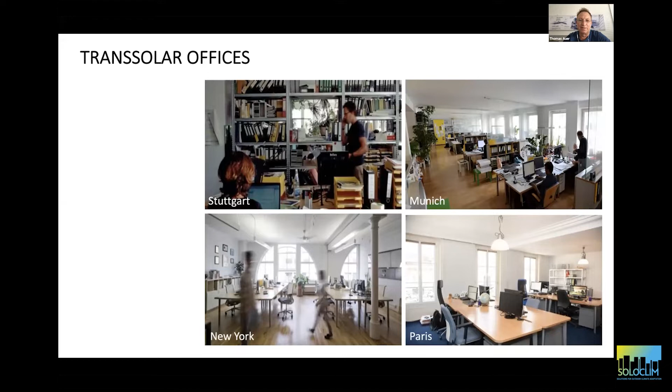climate engineering. We are doing this now for almost 30 years. Next year it's going to be our 30th anniversary. And we always called it climate engineering. As I said, it was more about developing climate strategies for indoor environments. But almost 15, 20 years ago, particularly in context of urban design, we started to look also in outdoor environments. Since 2014, I'm also a professor at the Technical University in Munich.

And so this is my team at the Technical University in Munich at TUM. And I feel really privileged to be able to work on both sides, to work in the academic environment as well as in practice, even though the academic environment certainly became the focus of my work.

Climate engineering, what it means, just quickly: we did this installation in 2010. We got invited to do an installation at the Architecture Biennale in Venice in Italy. And we had this idea to do an indoor cloud. We did a cloud once before in an indoor environment, and we did this not because we wanted to show that we are artists. We did this because we think that doing a cloud in an indoor environment is the visualization of climate engineering. You have to manipulate climate to the extent that a cloud starts to appear.

And since you all come from physics or engineering background somehow, you know that only water particles in air become visible as a cloud. And in order to have water particles in air, you need to have a saturated layer of 100% humidity. And if you have a saturated layer of 100% humidity, you can spray in water and the water cannot evaporate and it starts to appear as a cloud. So that's the idea.

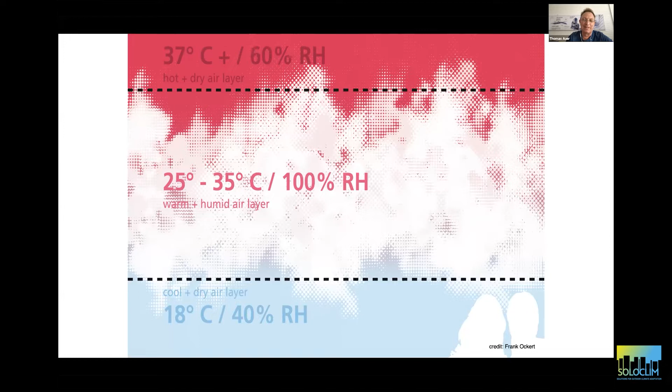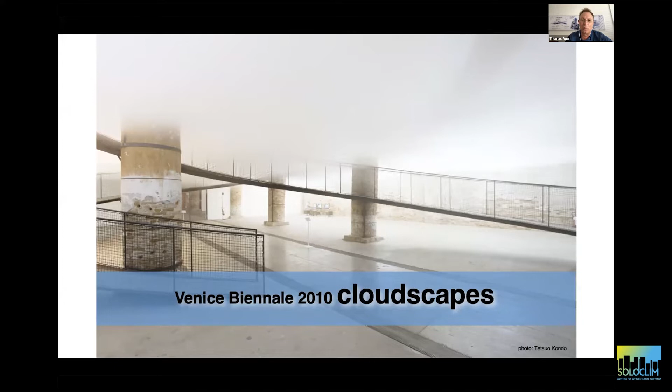So the physics behind is actually quite easy and straightforward, but it took us almost 4 months of testing and trial and error until we achieved the stable layers so that the clouds started to appear. Tetsuo Kondo, an architect from Japan, designed the space, he designed the ramp where people could walk and experience the different temperatures and humidities within this cloud layer.

So here you see what's our understanding of climate engineering. We usually don't do clouds. It's about comfort, it's about environmental quality in a space. But you can see to what extent one can really manipulate climate locally so that we provide comfort where people are. Now, jumping to the outdoor environment, I think what's very important is that we distinguish between outdoor comfort and urban microclimate. It's somehow related, but at the end of the day, it's 2 different things and 2 different strategies we need for one and the other.

By the way, this is a picture from Damascus, which we took in times when there was no civil war in Syria. It was quite interesting for us to recognize that people live and spend time in an outdoor environment in a climate where in summer during daytime you have temperatures around 40-ish degrees every day. So you really wonder, why do people enjoy the outdoor environment? Something similar we also found later in Singapore and Kuala Lumpur. In a very humid environment, people appreciated an outdoor environment treated to a certain extent over a fully air-conditioned, overcooled indoor environment.

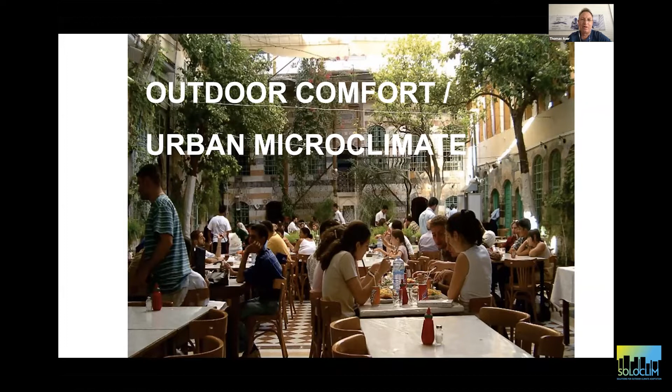So this made us curious, and we started to dig into it. We were certainly not the first one. We built up on a lot of research that happened before at several universities.

In 2014, our Munich office, Wolfgang Kessling, worked on this with a team from Austria on the Austrian pavilion at the Expo in Milan, called Breathe Austria. By the way, it was the only pavilion at the Expo in Milan which did not have any air conditioning—most of it was outside. The idea was to bring a forest from Austria to Milan to create a microclimate and make people breathe Austrian air.

There was something like 600 square meters of land one could use to bring this forest to Milan, but the intention was to bring the cooling potential of 1 hectare of forest to Milan. In order to increase the evapotranspiration of vegetation, we combined this with elevated airspeed and a dry fog system—adding more evaporative cooling by a mechanical system.

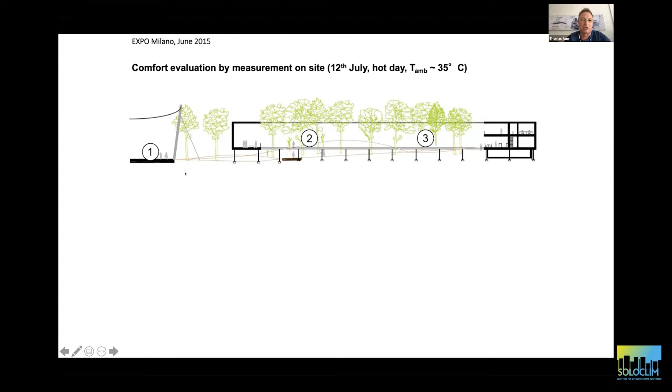Outside the pavilion there was a main street—I can't remember its name—from which all the pavilions went off, covered by a fabric shading device. So position 1 was already in the shade. These are the UTCI values—Universal Thermal Climate Index, a kind of perceived temperature. I think in this audience everybody knows this metric of perceived outdoor conditions.

What we measured in this main street was an air temperature of 34.5 degrees, a relative humidity of 44%, but a mean radiant temperature of 38.4, and basically no wind speed at 0.3 meters per second. This led to a UTCI of 36, almost getting into the area of extreme heat stress, just below it. What you recognize is the high mean radiant temperature.

What happens is that this fabric gets heated up by the sun and then acts as a radiator for the space below.

Now walking into the pavilion, there was still no evaporative cooling, just basically replacing shading from fabric by the shading of a tree. You see that the air temperature is a little lower, going down to 32.5. Humidity, obviously, when air temperature goes down, humidity goes up to a certain extent. But the mean radiant temperature goes down by 6 degrees, still with no air movement.

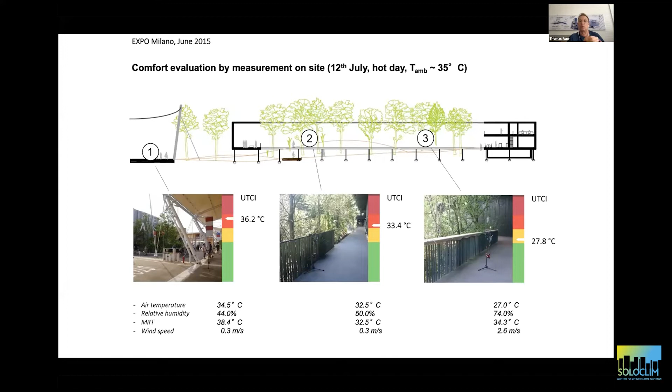So this is outdoor comfort. Of course it also has a microclimate effect, but it's not about the microclimate of a whole city. We see that in spots we can create environments where people find relief, where people can cool down. It's not a strategy for an entire city to work against climate change or increased temperature due to the urban heat island effect, but it's a strategy for a local spot, a local cool spot if you want, in a city where people can find relief.

You could say this is a cold environment anyway, so maybe people appreciate it. But particularly in Central Europe, buildings do not have air conditioning. In hot and humid environments like Singapore, people have air conditioning, and this increase in temperature leads to higher energy consumption. In Central Europe, we might get to a point where people suffer from this heat, with increased mortality during heat waves. We might reach a point where people start installing air conditioning on a big scale, which is certainly something we should avoid.

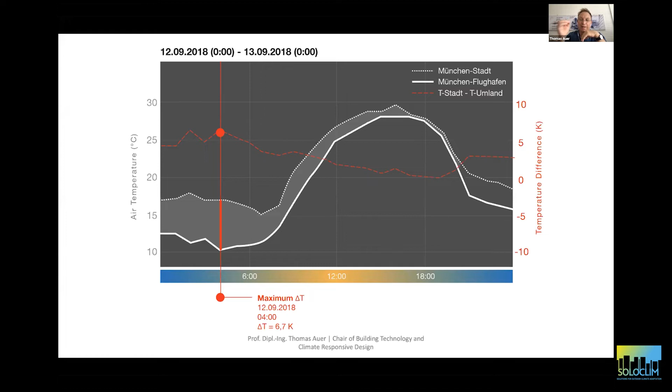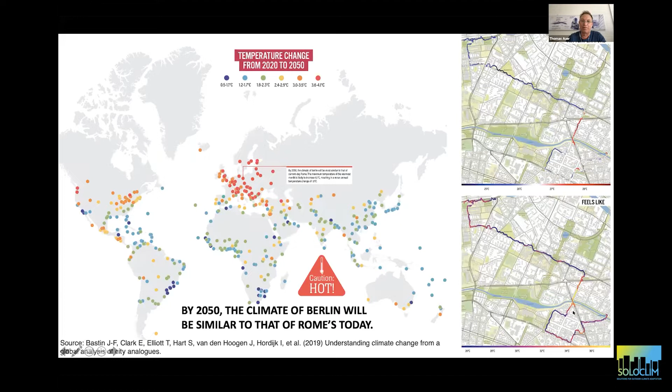This is when people start to suffer, when they don't find relief at nighttime because the city stays hot. So this is why we started these climate walks, to get a better understanding of urban morphology and outdoor comfort and microclimate, and as you saw in the Berlin example, the extreme variation is mainly based on urban morphology. It was about understanding how urban morphology really influences microclimate.

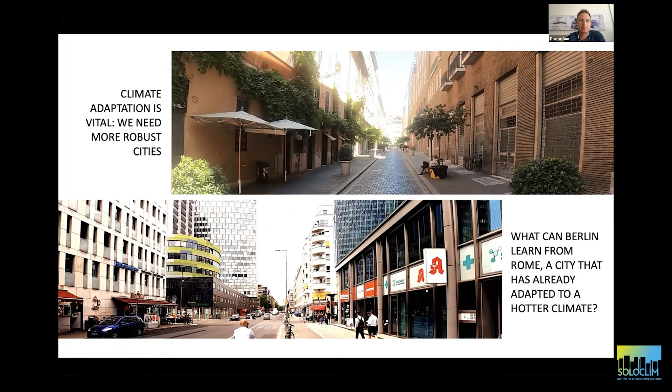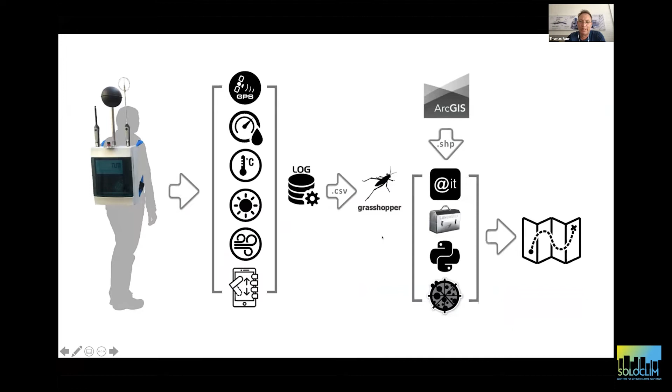This is Atta Chokachian in Berlin with our backpacks, which we use to do the climate walks. Here's what we measure: we have a GPS tracker so we know where we are, and we measure air temperature, mean radiant temperature, air movement, and humidity, as well as environmental parameters such as fine dust. Then in post-processing, we get all the data into a grasshopper routine so we can visualize it. At a certain point, we also started measuring skin temperature to better understand the physiology of people.

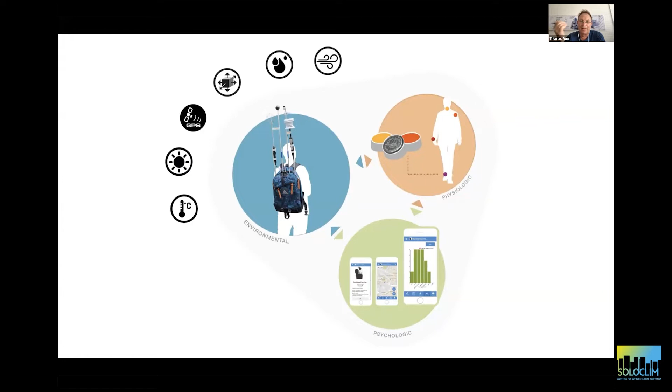And we have an app. We did this together with the Chinese University of Hong Kong. They started this climate walk, it was not our invention, we picked up on it. Together with the university, we developed this app where people give a response at certain locations about how they perceive the conditions. So we have the psychological, subjective response, the physiology by skin temperature, and the environmental data, and we try to correlate them with the urban morphology.

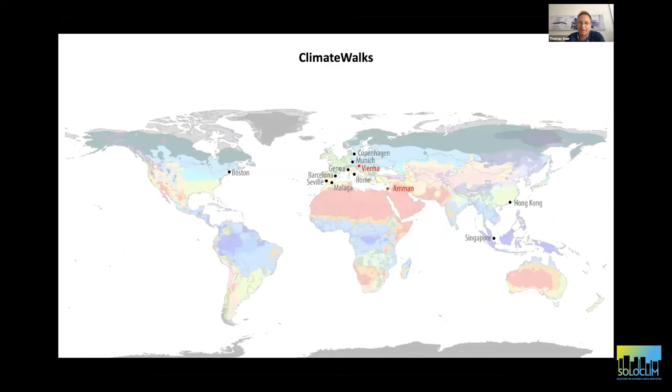So those are places where we already did climate walks in context of summer schools, etc. It's always a lot of fun.

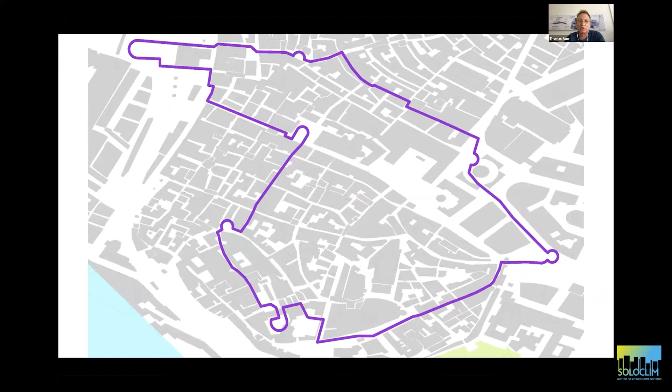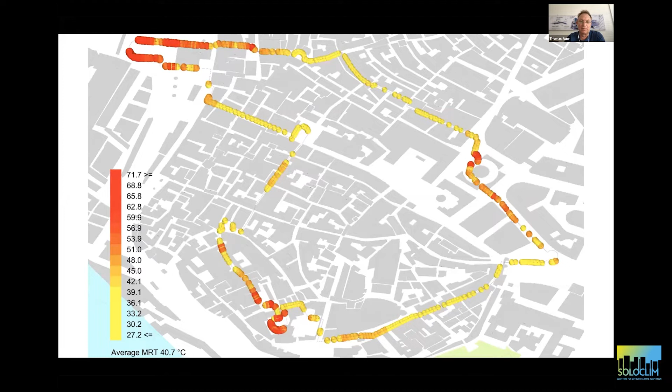This is the mean radiant temperature only, so we get the individual parameters so we can better understand what is contributing to the problem we have.

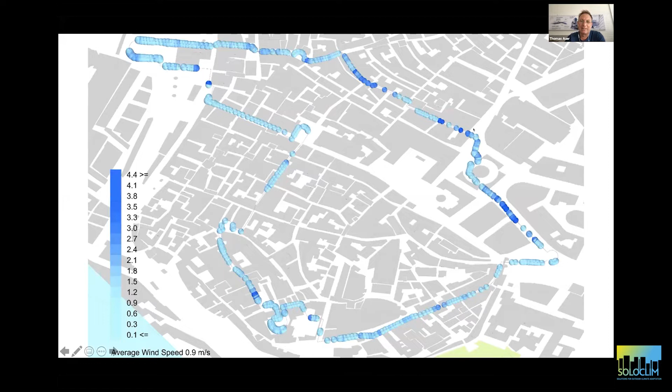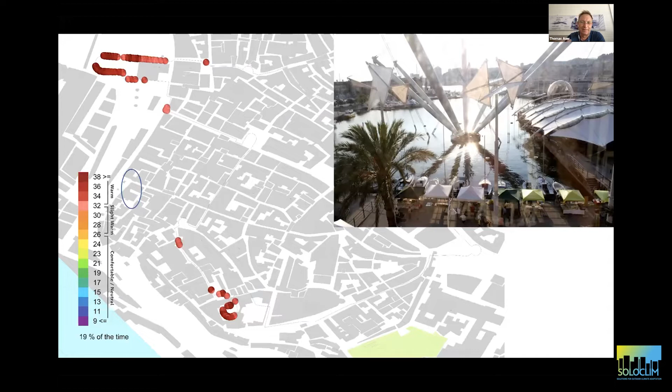The wind - you see we have higher wind speed up here in this street, which leads to lower UTCI temperatures up there. And then you see the result: there is a spot at the waterfront where you're exposed to the sun, which obviously leads to heat stress.

A surprise for us was to see a situation like here, where we have really good comfort conditions. We've seen the same in places like Rome and Seville, that this old medieval urban fabric provides really good comfort, really good microclimate conditions. It works really well - this self-shading effect in combination with thermal mass exposed to the outdoor environment, but thermal mass which doesn't heat up by the sun, which is not exposed to the sun.

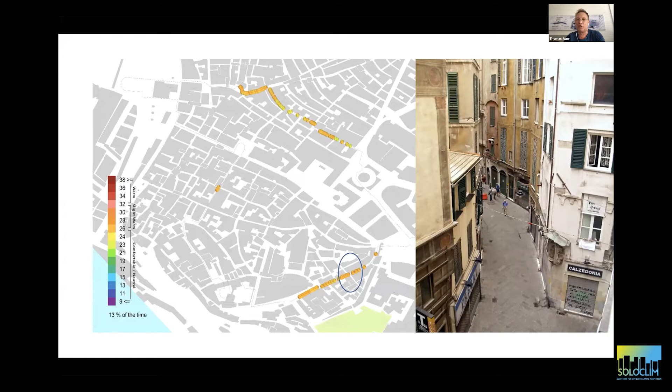So then we started to also look at sky view parameters so we get a better understanding of sky view, and can relate sky view with sun exposure.

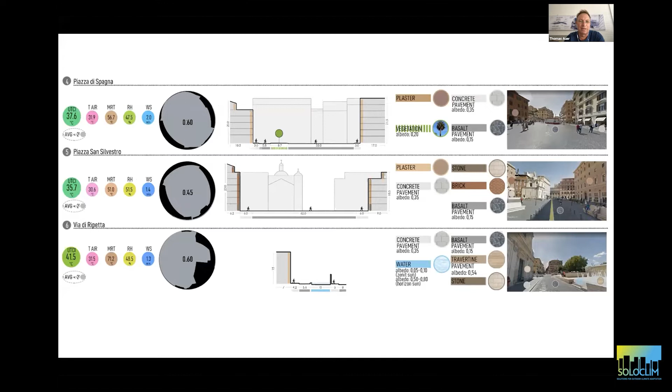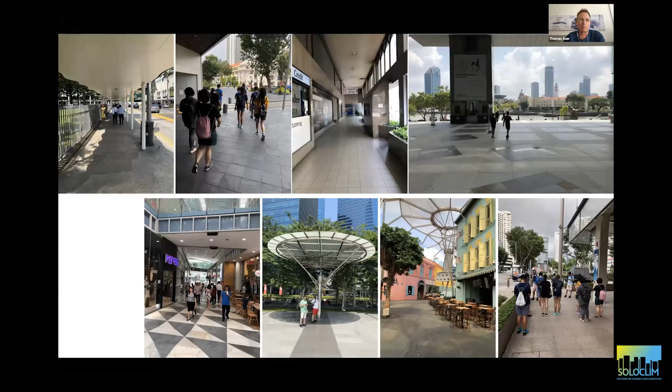And then in Singapore, we started to also measure skin temperature - different situations in Singapore. Sorry, I have to speed up a little bit to make sure I stay within my 25 minutes.

We still try to get an understanding of skin temperature. So far, what we see is there's a difference between people who acclimatized already and people just arriving. Someone who just arrived in Singapore and did a climate walk, measuring skin temperature the first day, shows something different than the following days. That was interesting. But also we see a slight difference between male and female. We didn't have enough data to get to a clear conclusion we could publish, but we still work on it.

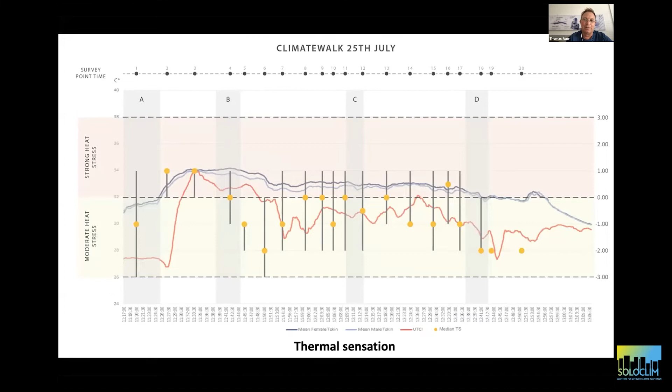And then coming back to Transsolar, we worked with TVK Architects on the redesign of Place de la République, with Martha Schwartz doing the landscape.

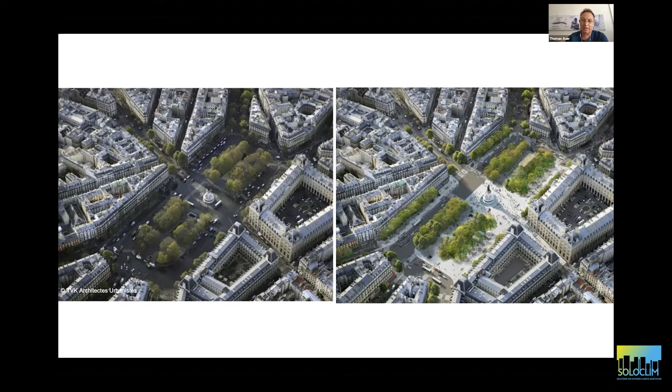So that's why I always say we need to distinguish in terms of strategies for outdoor comfort and strategies for microclimate. A microclimate in Central European cities is mainly related to nighttime temperature. Here, this is the final mood image of the fact that I'm convinced that this has a potential to provide better cities, better environments, which people are going to enjoy.

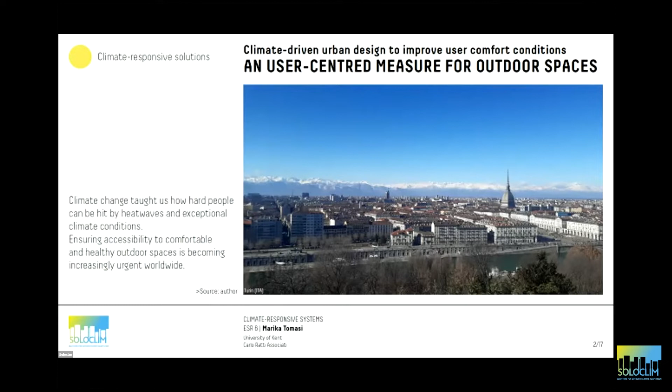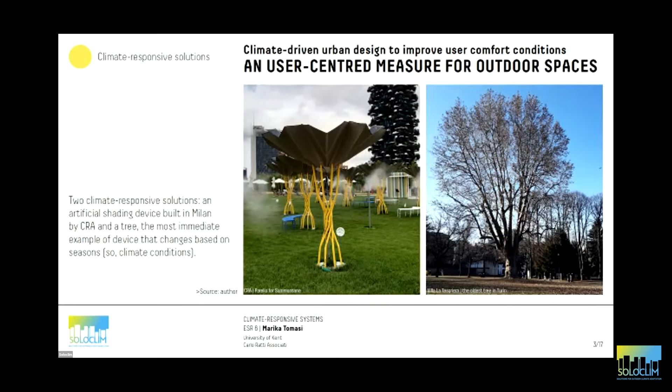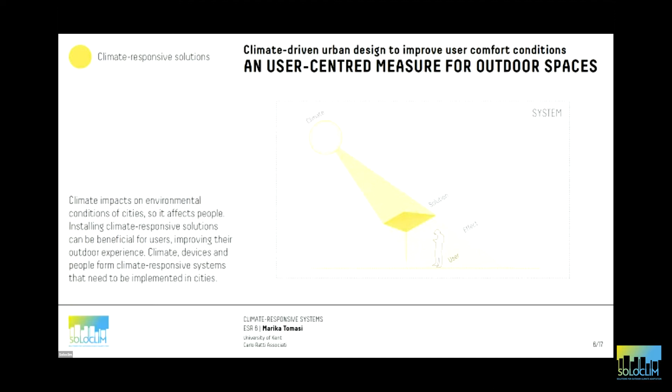But how can we move from solution to the concept of system? Let's start from considering the fact that climate impacts on environmental conditions of cities, and this has been well established by research. And so we can say that it affects the people, so the users. Installing climate responsive solutions can be beneficial for the users of the city because it can improve their outdoor experience. So if we consider climate devices and people, they form these climate responsive systems that need to be implemented in cities. And this is the system that I want my research to focus on.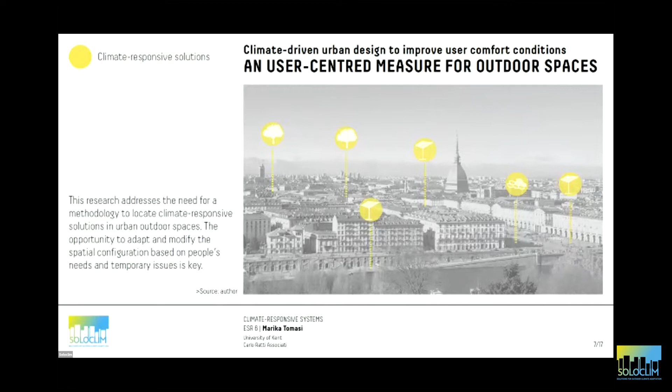So the research addresses the need for a methodology to locate climate responsive solutions in outdoor urban spaces, the opportunity to adapt and modify the spatial configuration based on people's needs and temporary issues such as the social distancing that was brought by the pandemic. I think it's key, and this is the final goal of the research.

The research focuses on solar radiation, and there are several reasons for that. Let's start from health risk due to excessive solar exposure, especially in summer, impact on thermal comfort, as already demonstrated by my colleagues. Its directional nature also allows us to manage the solar radiation component for upscaling purposes when we're working with urban morphology. So the final design goal, let's say, of my research is to create flexible outdoor spaces that can respond to the different solar positions. And in this slide, I'm reporting the different solar positions on a yearly basis in Milan.

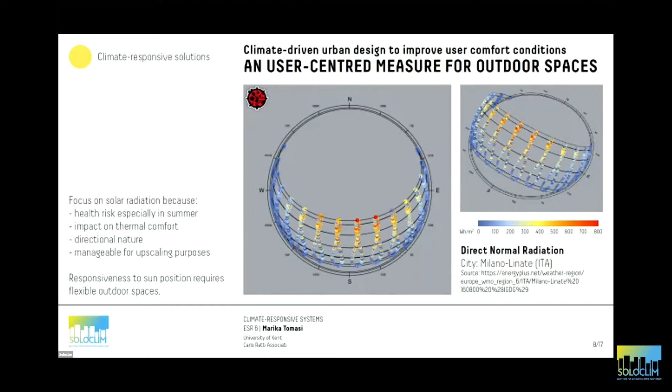In the second part of my presentation, I want to show you a case study that I'm using to explore this methodology and to better assess it. This is a new development in Milan. We can see some buildings that are mostly offices, and we can see an elevated plaza, a square at the center of the buildings.

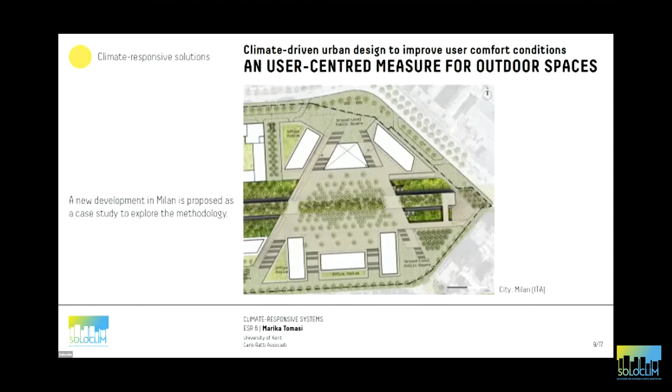So I started by simulating solar radiation. This map, I think, is already quite informative. We can see the areas that are most likely to be exposed to solar radiation on the 21st of June. We can see the shadow, the screening effect of trees, for instance, at the center of the plaza, but we can also notice how the shadow of the buildings changes, for instance, during the hours of the day.

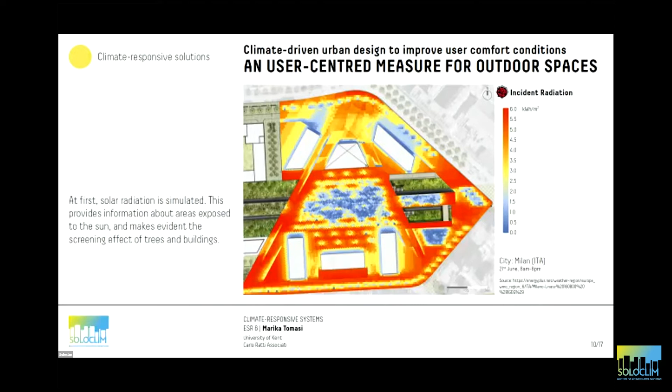So I think, as I said, this map is already quite clear climate information that can be implemented in the design process. But I also think that we have to translate this information and we have to build a bit on it from the designer point of view. So the question that is moving my focus to the user experience is, what does climate mean for users? So what can we learn from this map, and how can we connect climate and users in the outdoor spaces? So the chosen angle to include this user perspective in urban design is walking time.

You can see here I overlaid the master plan with a grid, with 2 grids actually. They correspond to 2 different walking speeds. I defined them through literature review, and they refer to different levels of physical abilities, because pedestrians can have different levels of physical abilities. This grid enables us to measure the space actually from the user point of view.

So to evaluate, for instance, how much time is needed to cross the master plan or to go from one point to the other. And if we overlay this grid, for instance, with the solar map that I showed before, we can also evaluate how much time a pedestrian spends in uncomfortable microclimate conditions, for instance. And this is valuable information, in my opinion, for urban designers.

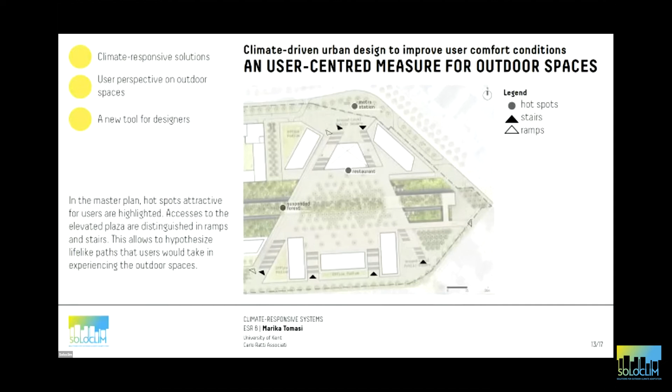So from the really designing point of view, I started highlighting the hotspots of the area, as well as the accesses to the elevated plaza. And I distinguished them between stairs and ramps because of the different levels of ability I was talking about. This allowed me to hypothesize some lifelike paths that users would take in experiencing this outdoor space in particular. And this is the result that I came up with. I'm going to show you 2 different user experiences that I simulated.

The second user experience scenario is an old pedestrian. So he's accessing the elevated plaza through the ramps. We can see that he is taking the ramps from southwest, reaching the elevated plaza, and then crossing the area to go to the other side of the new development. In this case, there's a first part of the path which is exposed to solar radiation, while in the second part we can see the screening effect of trees. For me at least, it's really interesting to imagine these 2 different experiences, the thermal condition of the users while they're experiencing this path.

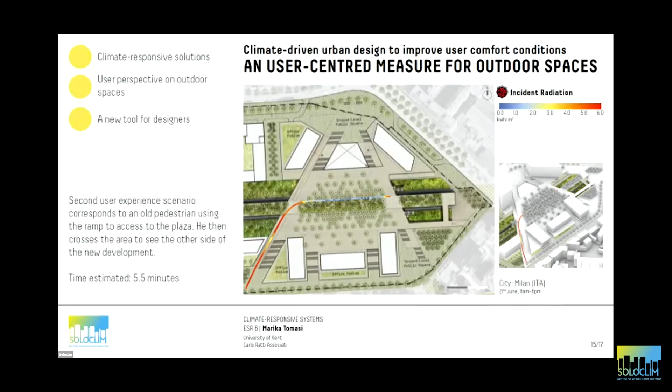So the final goal of the research, what's next? The final goal of the research is to provide a protocol for urban designers and planners to integrate climate responsive systems in master planning. This will be the result of an assessed methodology to upscale the solutions to the neighborhood and city scale. So I showed you today how I started from the climate responsive solution, and I'm trying to understand where to locate them at a neighborhood scale in a master plan based on the user experience.

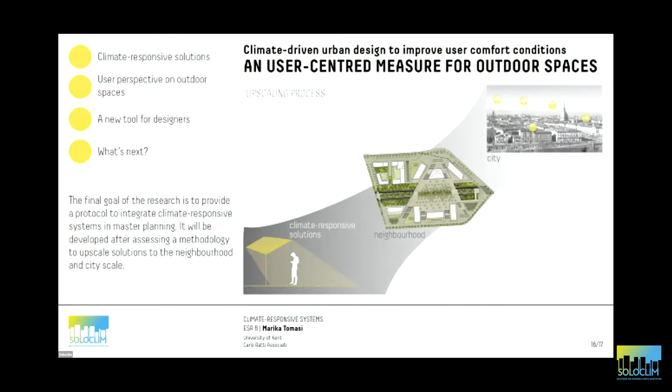The final goal, in my opinion, is to understand which areas of the city need urgent interventions, for instance, which are the most used by users, or where we want the users to go. And I hope to provide a useful tool for designers, also applicable in practice.